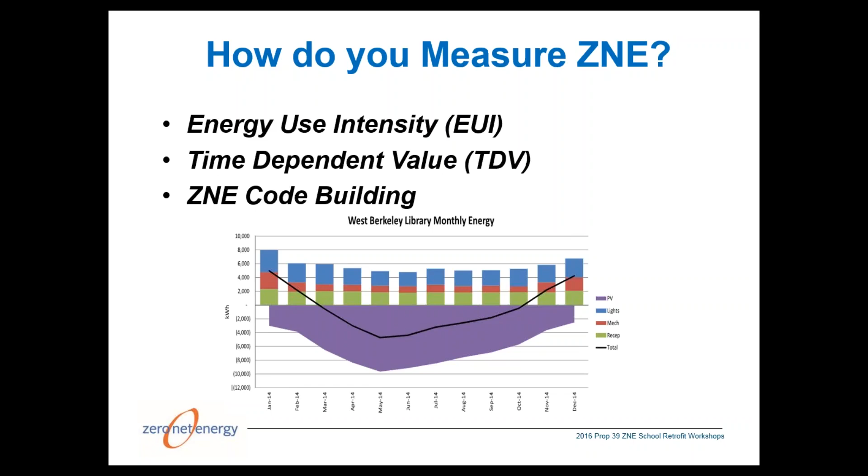And then there's a ZNE code building, right? So we're looking at getting the code to zero, and a ZNE code building would also be using TDV, and we're going to see this coming, and it's already happening in the use of reach codes and the code cycles that we have coming up.

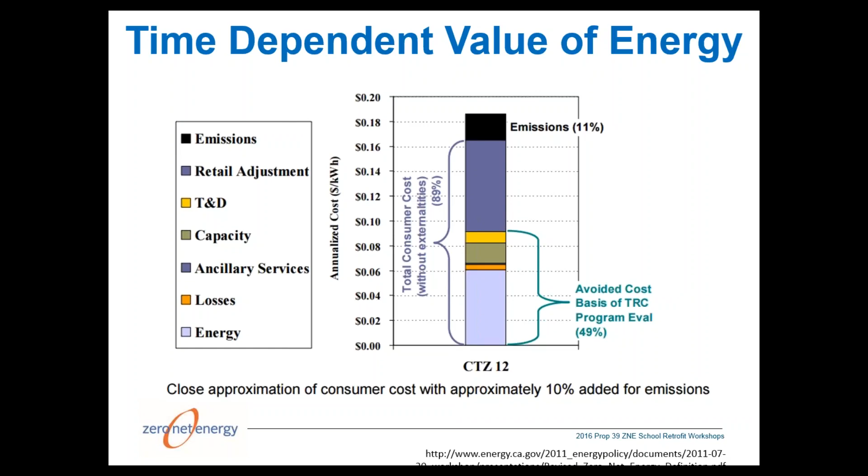So here's, I think, a fairly simple way to understand time-dependent value of energy, and again, that TDV metric, basically saying that we're not just thinking about energy, which is that light blue bar on the bottom, but we're also thinking about the cost or impacts of losses of energy, the ancillary services that utilities and energy provides, the capacity of the utility grid and the need for capacity when energy load comes on to the utility grid. There's transmission and distribution costs and the impacts associated with that. There's a retail rate adjustment that the utilities use to factor in the cost between the wholesale rate and the retail rate, and then basically the impacts of emissions from energy generation or electricity generation. So the price of electricity is really factoring in all of these things, and so this is why the California Energy Commission is using TDV instead of just electrons or electricity or kilowatt hours for buildings in California, and this is what's being used for the ZNE definition in California.

So I'm going to hand it over to Heather to give you a status update on ZNE, and really to set the context for these zero net energy retrofit pilots.

Thanks, Rob. NBI has been tracking zero net energy buildings for a good long time, and we probably have more information than any other organization out there. We're happy to share a lot of that with you as resources, and we'll cover that more at the end of the webinar. I hope you'll stay on. I know it's a bit of a longer webinar, but there's a lot of meat here that can help you in your process.

One of the great resources we have is our Getting to Zero Buildings database, the largest database on ZNE buildings in North America, and it's a portal into the Department of Energy's High Performance Buildings database. There's a lot of great detail — you can get summary information, but also in-depth information from case studies, including costs, finance, and design strategies. It's one of the only databases searchable by ZNE status and energy performance. When you have a chance, please check that out.

Much of our research has been based on our initial report that started in 2012, where we did a national scan and looked at all of the ZNE buildings we could find through case studies and design teams, trying to document all of the buildings across the country, both verified and emerging. Now we've documented 44 states and provinces with ZNE buildings.

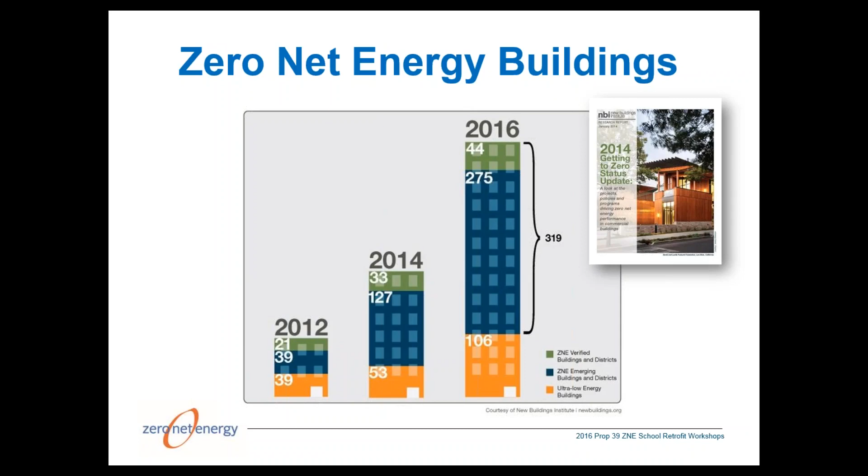We still have a small set of verified buildings, but that doesn't mean there aren't a good number out there — it's just that getting the data is a challenge, so we encourage you to continue sharing your data with us. These are the ones we're aware of. So please tell us more if you have a verified building, or think your building is performing at zero.

A good set of this started in the public sector but is consistently moving into the private sector, as well as nonprofits really walking the talk with their mission — buildings like the Packard Foundation, the Hilton Foundation, and other Bullitt Center-type buildings demonstrating leadership. We're also seeing this happen not only in new construction projects but very possible in renovation — a quarter of the market is in renovations.

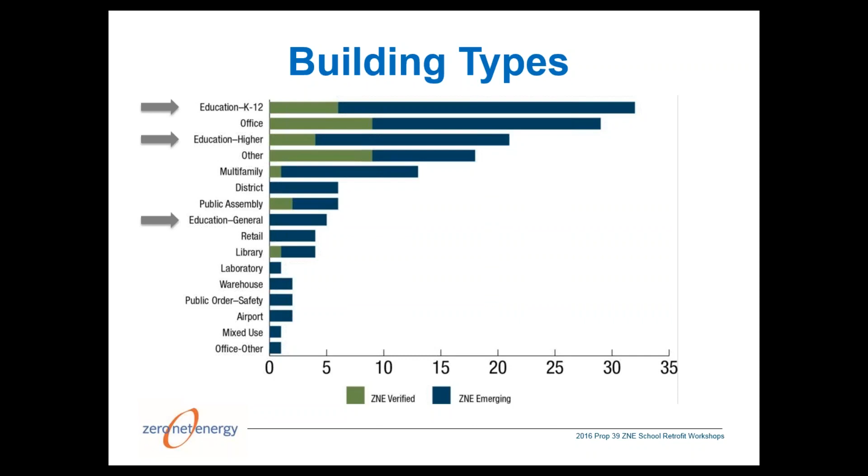A broad diversity of building types, as I mentioned, but also the education sector is really leading, both from K through 12, higher education, and general assembly, so like libraries, such as the California building, the Berkeley West Branch Library, which was also just, and it's actually a net positive building, just verified as LEED Platinum and certified by the International Living Future Institute. So we have a lot to learn from this education sector really moving into this market.

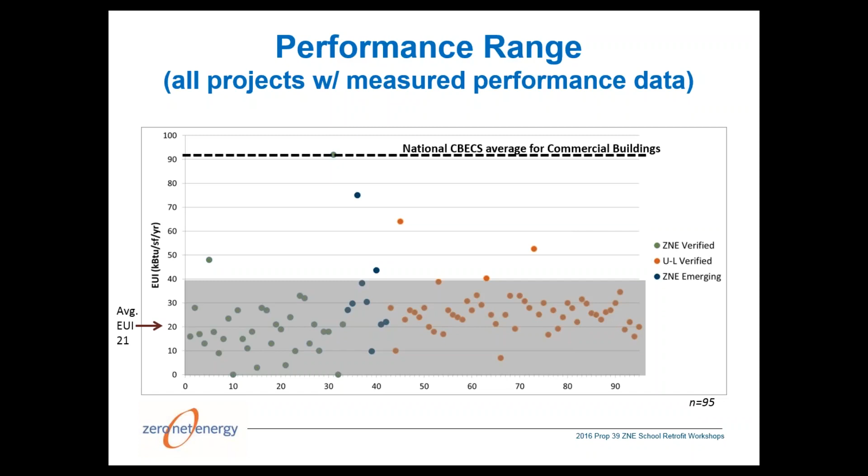When we looked at all of the buildings with measured performance data, we saw a consistent bar compared to what our national commercial building energy consumption survey average was for these buildings. We wanted to highlight that this was in a spectrum of 0 to 40 of energy use intensity, and the average was around 21. That's a good benchmark to know, because we've heard from other designers that if you aim for around 20 for an EUI, and your building is maybe 2 stories, you can probably get enough photovoltaics on there to get to zero. There's a similar range when we looked at all the education buildings that were verified, around 24.5 was the average. So we're seeing buildings getting even lower EUIs than that as we have more and more data.

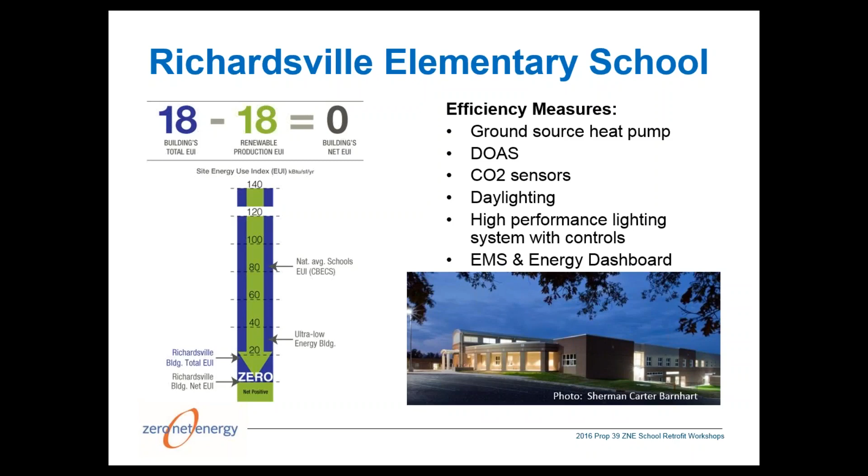A particularly great example of this is the Richardsville Elementary School in Kentucky, one of a set of 6 schools that CMTA design firm was hired to develop. As each school was designed and built, they learned from the last project and were able to incorporate more and more energy efficiency measures to get to zero.

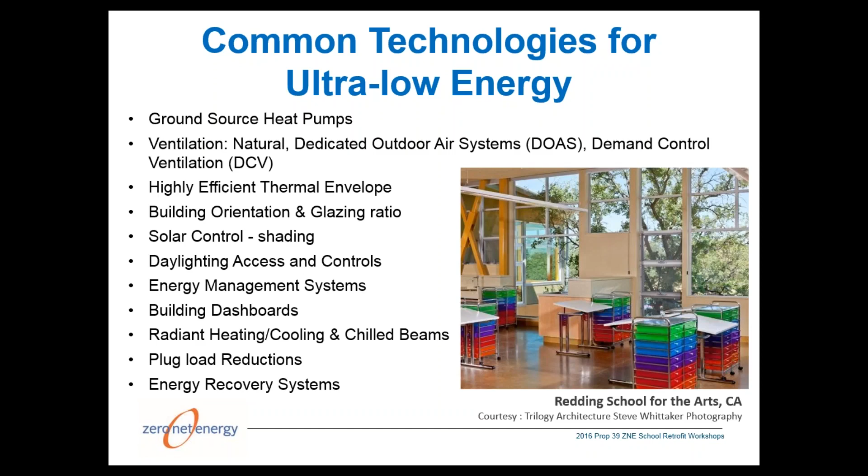So through these projects, we're seeing there are very common efficiency measures, similar to what we found across the board, common technologies getting to ultra-low energy: high efficient envelope, building orientation and glazing with a strong focus on daylighting and controls, using energy management systems and dashboards, and a focus on plug load reductions. That's particularly important to think about as we get our buildings much tighter in their envelopes and work with our lighting and HVAC systems, since plug loads become a much larger piece of the pie we have to address.

Some of the challenges when looking at where ZNE is moving and what the perception in the market is really center on the perception of cost, not necessarily cost itself, but perception of cost. We're finding we're able to get there within a reasonable range of construction costs, but helping overcome that perception is important. Often photovoltaics are delayed due to cost, and getting the metering and data right, and using the data correctly, is also sometimes a challenge, making sure people are trained appropriately to use that data effectively to adjust and course correct where needed.

Often the projects are not occupied or operated as modeled, so that's another thing to be attentive to. Are you having a higher number of students in a building, or maybe not operating on the schedule that was originally designed and worked out with the design team?

Commissioning is becoming an increasingly important part of the design process, making sure you have maybe a longer time frame in your contract, that it might take 2 years instead of 1 year to really tune up the building appropriately.

And then last but certainly not least is the fear of disclosure. We can tell you about the buildings we know about, but there are many more excellent examples out there, and I think there's a perception that if you're not at zero, there's something to be a little embarrassed about, like a failing grade. We really want to emphasize: don't be afraid to share. There's so much we can learn from each of these projects that can inform other new emerging projects. We want people to be able to share their data. Maybe you're not quite at zero, but it's still a really great building and something to be proud of. We really hope people will continue to share their data with us.

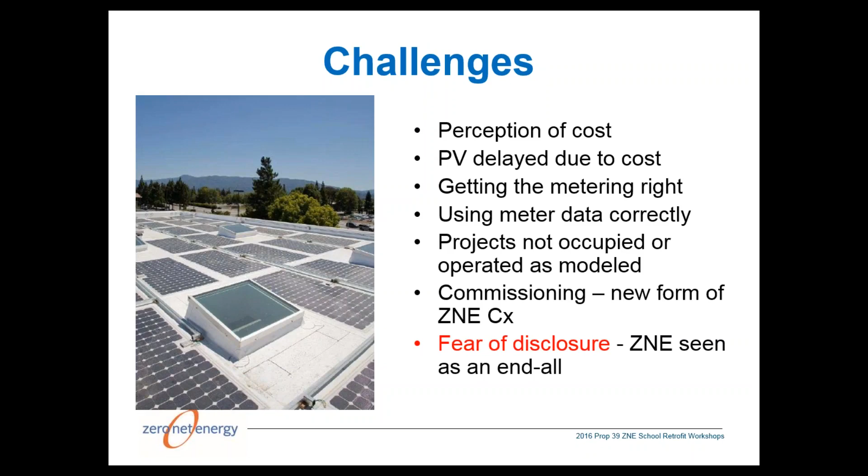One of the great resources that has emerged over the last year, in support of the California Public Utilities Commission, that NBI produces, is the California ZNE watch list. This is a great list of all the verified and emerging buildings in California. Last time we did the list it was around 70 projects, and we'll be putting out a new one in the next couple of weeks with even higher numbers.

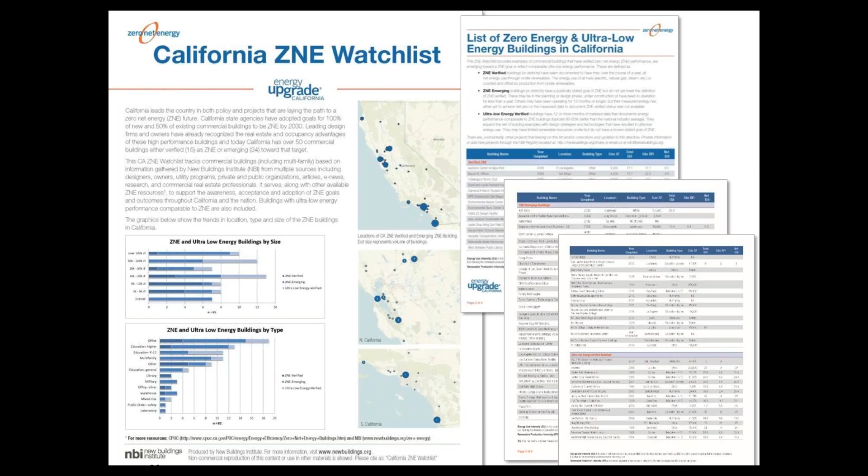So this is a nice way to look at other projects that are out there that might be similar to yours, learn about the design teams that maybe you might want to approach for a project you're doing, look at how these buildings have performed. This is a great resource for you to kind of track and get on our notice list when these come out.

Also wanted to mention where we are nationally on the school side. We're at a very early stage for schools, but California is continuing to lead much farther out in advance. There will be many more added to this set, particularly with the pilots coming forward and more schools that people keep telling us about. So we wanted to jump into talking about how you can learn from these projects using case studies as your guide.

We'll talk a little bit about some ZNE and ultra-low energy case studies, roughly and briefly, and then we'll have Pauline Souza from WRNS Studio join us to talk about one of the first verified ZNE school projects in California.

As part of the Prop 39 work, NBI is developing 5 new case studies. This documents some of the design strategies, but also some of the planning and lessons learned of these projects. This pilot is about zero net energy school retrofits, both K through 12 and community colleges. But there really aren't any ZNE school retrofit examples yet, so we scanned the market for projects, both big and small, that we could learn from that had different strategies we thought were most valuable.

These are the set that we have developed some draft case studies for, and we'll be coming forward with those in the next few months to share with you. For the Berkeley West Branch Library, even though that is not a school building, it is a very typical building type for schools. Pauline will talk about the Stevens Library at Sacred Heart Elementary School, which is a good example many schools can think about for their libraries.

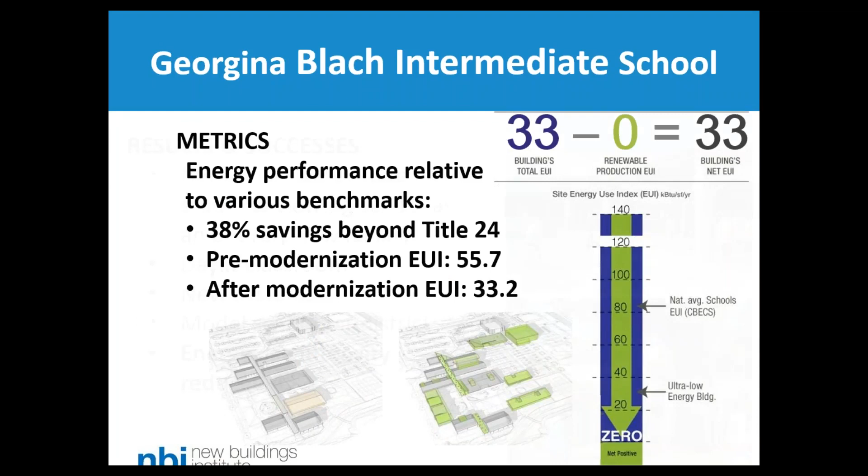There's a lot to learn from this particular project too. Very high energy savings beyond Title 24, lots of daylighting, and it became a model school for the district, which then inspired the district to look across their portfolio of buildings and do special studies.

To find out how much further they would need to go if they wanted to achieve net zero energy or net zero water too. So there are some more California examples I wanted to mention. We'll hear about the Stevens Library as well in a moment, but also the Redding School of the Arts is an emerging ZNE project. We have a case study, an NBI, on our website that was one of 8 we've done for the California Public Utilities Commission - these are nice short case study briefs, 2 pages, that make a good example if you want to bring this to your superintendent or school board.

If you want to be educating and advocating for this - this is an emerging ZNE building. I think it has an EUI of 8. What they've done as an interesting strategy is continually add photovoltaics to get to that low level. So even if you can't put it on all at one time, you can continue to add it.

We're going to be doing a tour on May 9th of the Solano School, which is an emerging ZNE project in Southern California. That was designed for ZNE, and they'll be adding their photovoltaics over time. The Blackford School is one of 8 ZNE projects that the Campbell School District has decided to pursue, and I think 2 of those 8 have been built - they're using kind of a prototype approach, so there are some interesting lessons to learn there, and La Escuelita in Oakland is another good example.

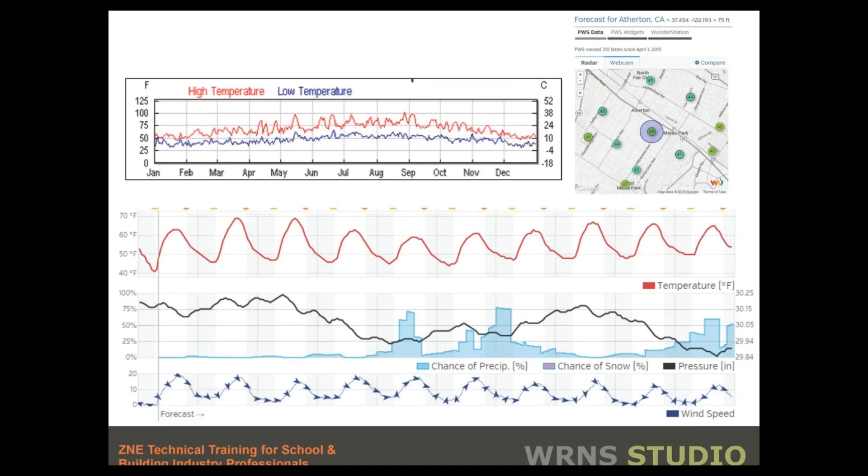A view of the trees we worked around. What a lot of you know is that before you start, you gather what you have - the forecast, the temperatures, the wind, where it's all coming from - and then you start to make sure you're designing with all those considerations.

We often use not just benchmark systems like LEED or Living Building, but also the ideas brought to us through the AIA COTE measures, really about flexibility, long life, and feedback loops.

The key again is that this project, although in an affluent area, did not have that affluence trickle down to this particular project. It was about $250 to $300 a square foot - that's what we were asked to design to. In that area at that time, that was 20% less, normalized across the project for this building we're going to talk about next, and then again the campus.

The next slide shows the 4 buildings, and our targets - what we understood at the time that CBECS provided us - and then this evolved approach where we were looking at various benchmark systems.

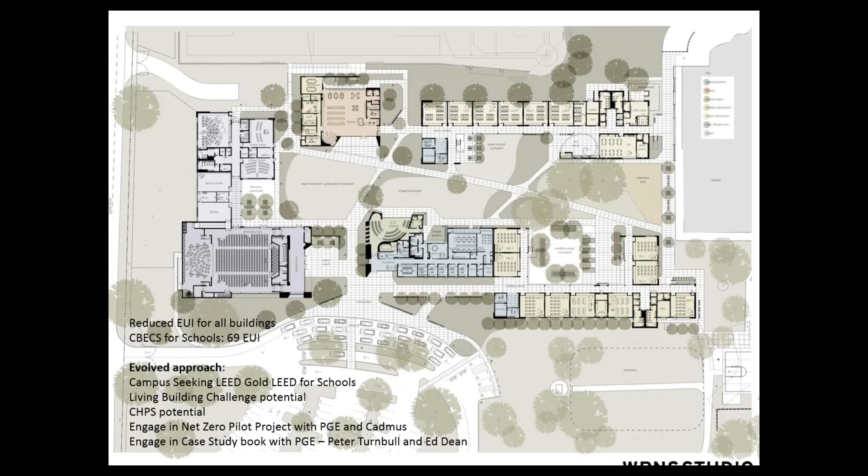We engaged in a net zero pilot project with PG&E and their consultant Cadmus, and then with others - Peter Turnbull and Ed Dean - in trying to tell this story. Our project was also, because it was a campus...

we looked at what we could do to make efficient buildings, and how those flat roofs could not only be used to collect water for reuse, but those roofs are all designed for and are PV-ready. There's space allocated and noted in the construction documents for future inverters, there are pathways up to the roof, and the structure was designed to make sure that could be done later.

So this is about future-proofing, or making it future-ready for net zero if it couldn't be done right away. As this evolved through DD, we talked about that as a strategy, even though it wasn't clear that the money could be there for PVs.

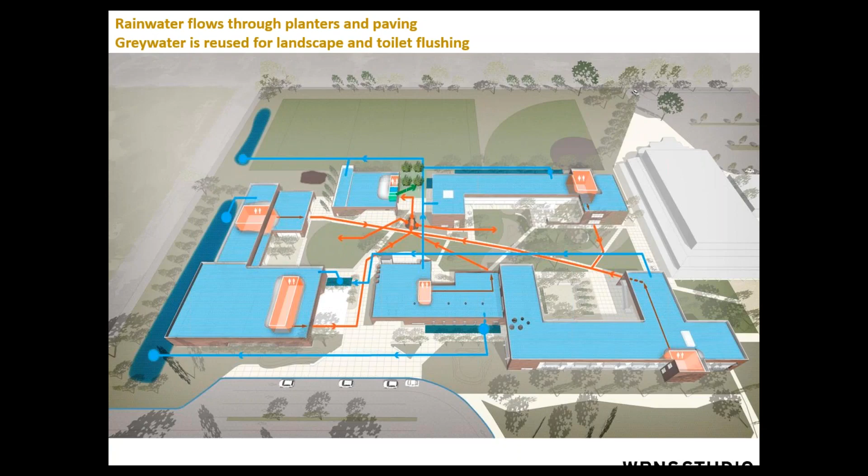So that's the building at the top that I'm going to talk about. Against the CBECS standard, we thought we could get to a 27 EUI. That's the south elevation over there in the back.

And that inspired them to find the money somewhere within the buildings. We had to work with our estimator and really with the builder. But the fact that the story evolved with the design, and we were able to show it was possible, got them so excited that they started to move towards approving for the LEED final submission to look at the Living Building Challenge net zero participation, and then we're continuing to look at it from a petal recognition.

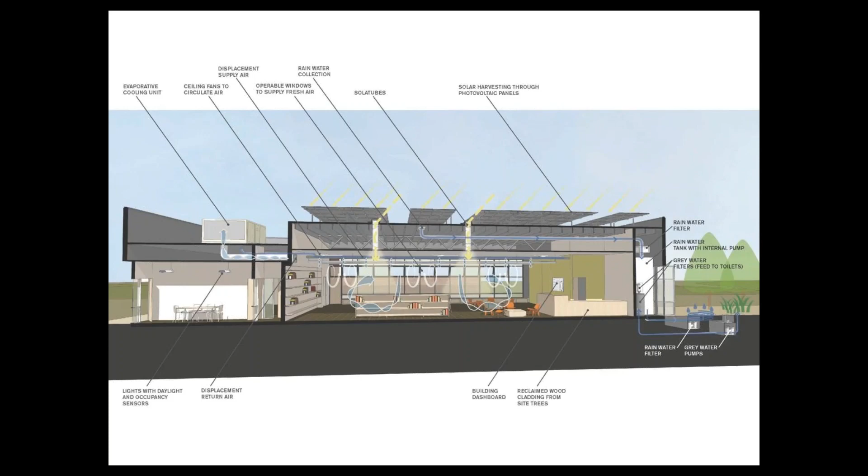So the next slide, just a little bit on the stats. The system is mixed mode, using the concepts of displacement ventilation. We have air that comes over the top of the main book space, flows down, and then sort of puddles, as many of you know, and then is exhausted through another point, which I'll show you. That strategy was very efficient, so we used larger ducts, having windows at two ends to allow for fresh air, so it could help augment that main space.

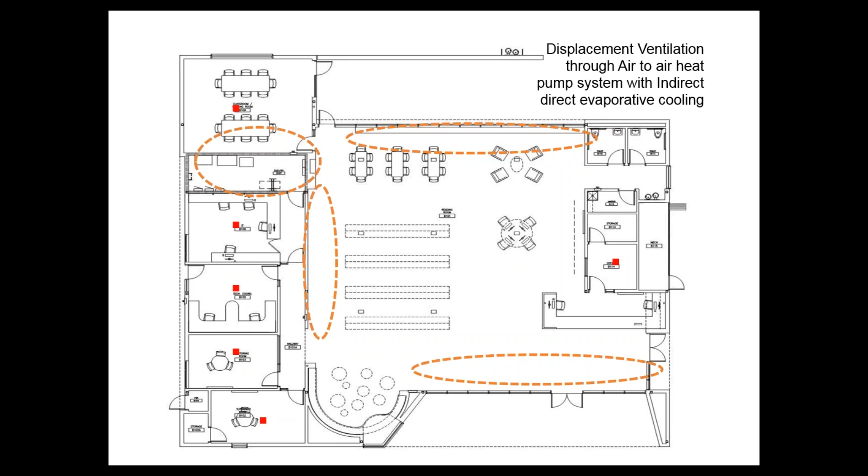Next slide. And then solar tubes - so the dashed lines show where the displacement was coming through, both in the top and bottom orange dashed lines, and then to the left, that's where the exhaust would be.

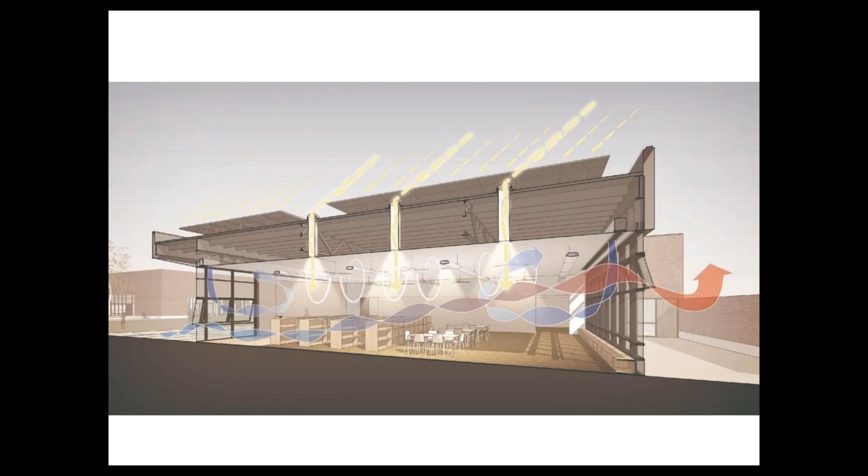Showing how simple daylighting strategies at the top for solar tubes could be manipulated and tuned down. Good light from the north and south. We really tried to tune that exterior as we were doing some work to see how light would penetrate. We've learned a little bit of a lesson in terms of daylighting, that you need to use a few better tools, because we thought we cut out a lot of glare, but there's still a little that trickles in between 11 and 12. But just the idea to tune it to daylighting.

And then the roof is shown that we were able to fit 170 panels, at that time 250 watts per panel, sized to be 40 kW over the target, which at that time 15% seemed to be the right strategy. We had to change from tilted to flat panels, which is a little less efficient, about 13%, because the city didn't want to see anything over a certain height limitation. So there was that that we had to work through.

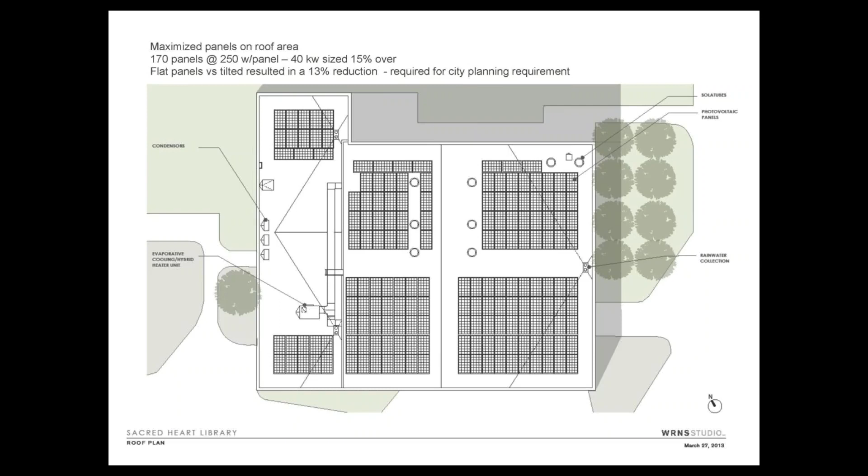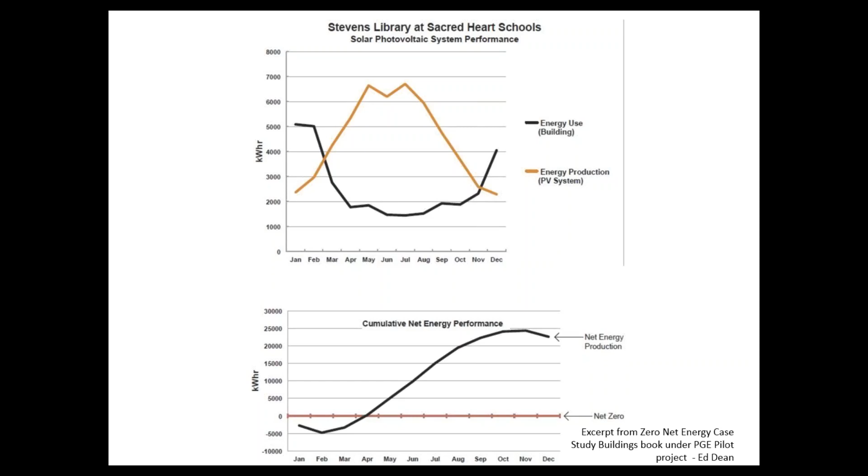And then the next slide, just showing performance, which we were able to track. Again, like I said, we had PG&E that was our partner through the end of the phases. They came in with their own metering, and we were able to compare what we were seeing and what they were seeing to show that we were overall producing more than we were using.

Next. And then to show that in the graphs that we would collect through its use, the prediction was 50,000 kWh, and then as we were measuring, we were really seeing that it produced more, approximately 56,000 kWh. So that was a good sign.

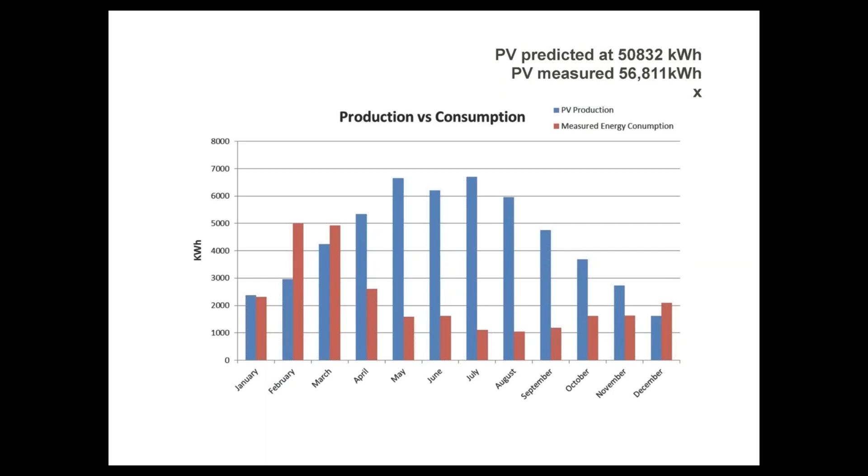And then we started to understand what some of the challenges were in comparing our modeling data, or at least what we predicted, to how it was being used. And I think this is our big next step.

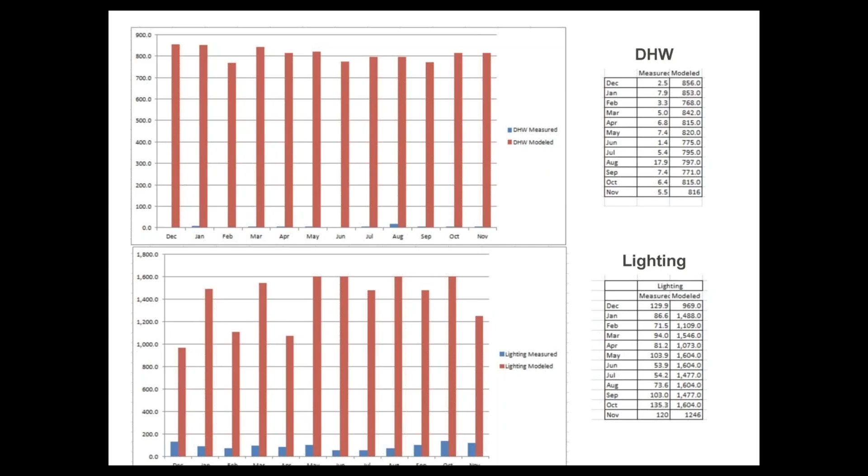The hot water heater was not being used as it was modeled - you can see quite a big difference. And then the lighting too, as was modeled, is not how it was being tracked. I think we attribute that to the modeling software not being able to be tuned to the contribution of natural daylight, and probably because as people are more tuned into this building being an example of sustainable strategies, they know that they don't want the lights on. So there's a little people side of it that we were hoping to track more of.

Mechanical seems really pretty close to what was predicted. January and February were days where the systems weren't working well, and so that's aligned with what we were finding out, and the miscellaneous, as we talked about, sort of all the other plug load and how we had modeled it - but really, again, maybe the people side brings the measured part down.

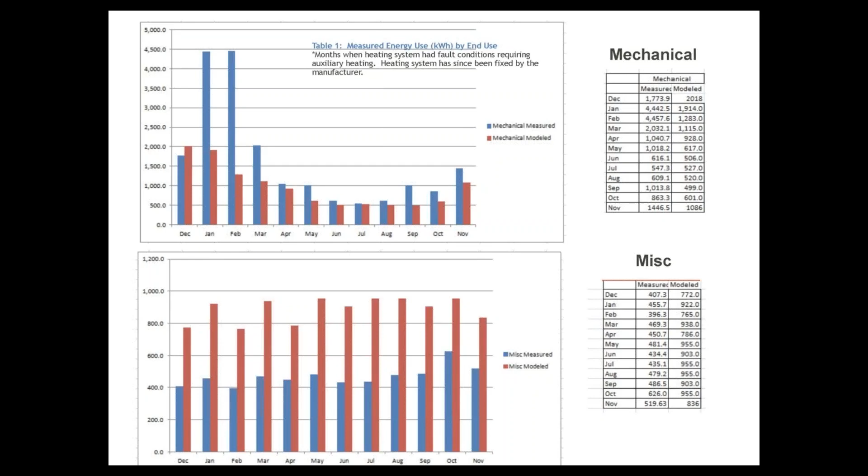So the highs and the lows, which really can be attributed to better tracking and constant communication.

And the envelope - so in the envelope, we really were of the mind that we had to reduce where we could. So you reduce before you produce, right? So the envelope was really studied. We thought we were getting to pretty good R values.

As we were going through construction documents, the owners found out from their insurance company that if they had a metal stud building, they could reduce their insurance burden enough that it made sense to change it out. But it changed our energy model data, and if we had stuck with wood, we could have made a real difference in that envelope. I think we would have been at R20 versus R12. So that's a lesson we learned.

It speaks to looking at your envelope more as you design. What we also didn't do was put insulation below the slab, which I think we missed, and we're trying to be more careful of that now.

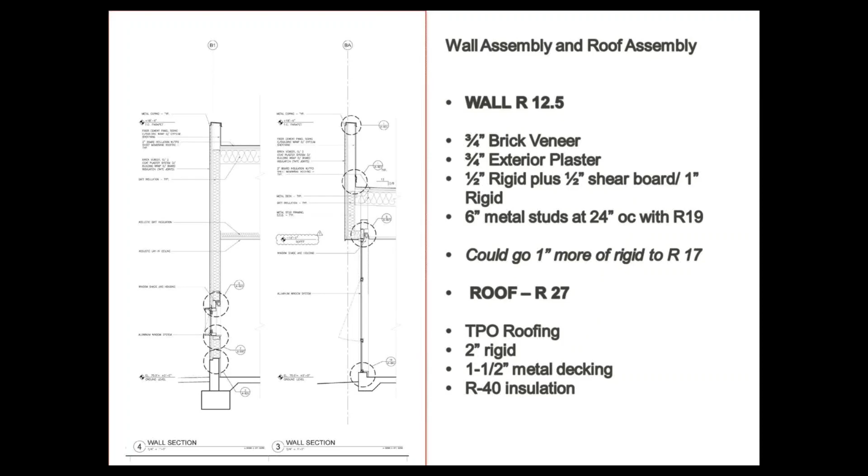Next slide. A picture again showing how that change in assembly from wood to metal had to be tracked. You could easily, in the throes of CDs, forget that you need to track that and how it needs to be accommodated in your energy budget.

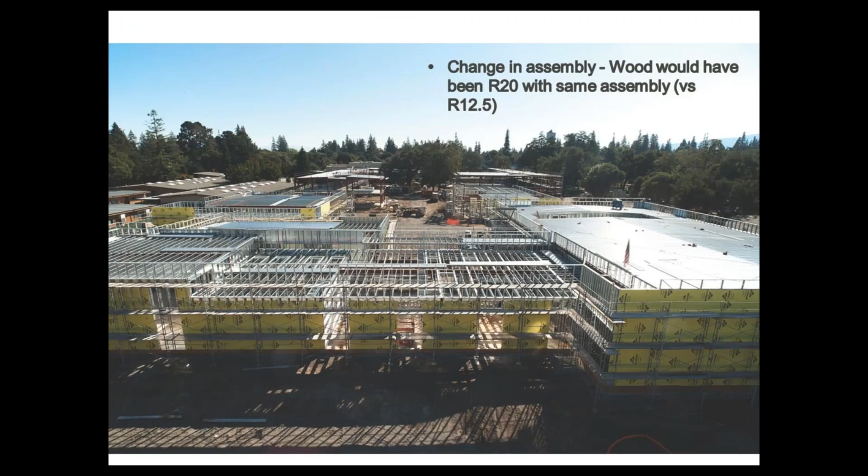So for lighting, we talked about the daylighting model and how that would have improved the comfort of the space, but also how artificial lighting needs to be tracked. The next slide shows in pie charts quite a change: the top chart shows 37% predicted, but as we tracked through it, it came to 4%. That's a huge difference in kWh, about 8,000 kWh, which is a big difference in terms of what we would have put in for PVs.

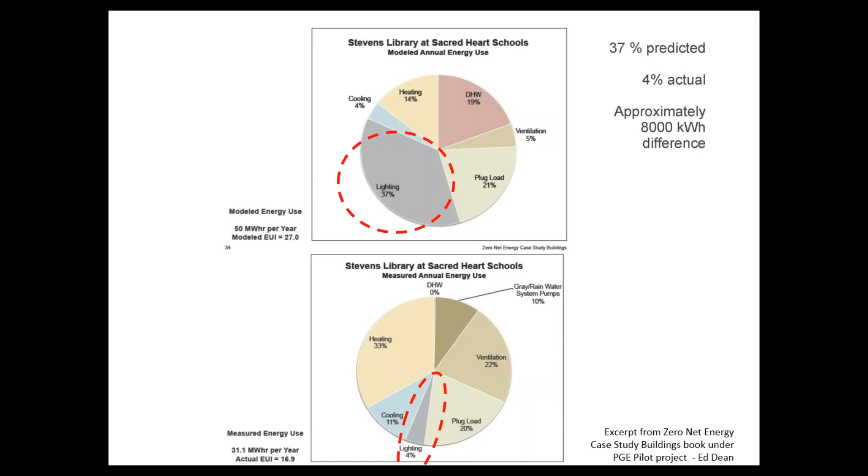That says a lot about how we looked at lighting and controls, and how we explained the building in ways that changed behavior. It really comes down to the people side of it that we have to be more aware of, and what their understanding is of comfort.

If we know the contribution of daylight is critical not just to the quality of the space but also to the predicted energy model, what programs are out there? What can we do to drive that into some sort of exceptional calculation, or to right-size the model?

So it goes a bit more into modeling the site and the plug loads. What we learned on a campus project is that everything is a little bigger than your footprint. The gray water system and all the pumps that make that work, through filtration and then irrigation, was burdened to the library. All of that you see on screen to make it work was tied to the electrical panel in the library just because it was closest, and we didn't account for that in the model.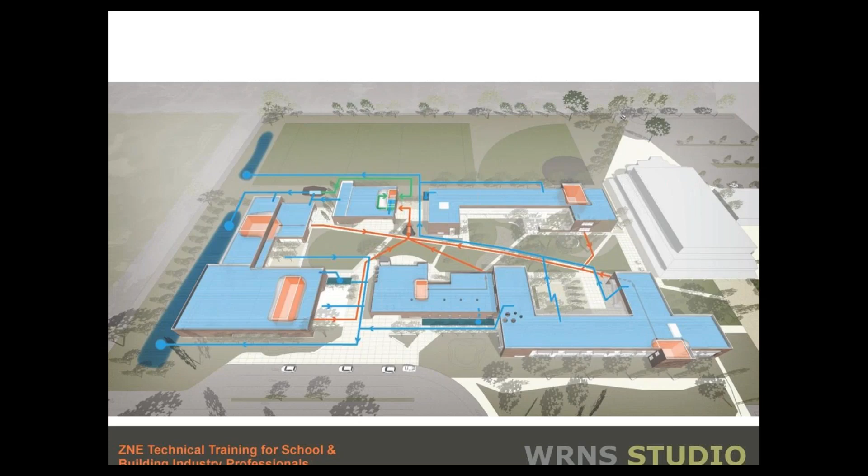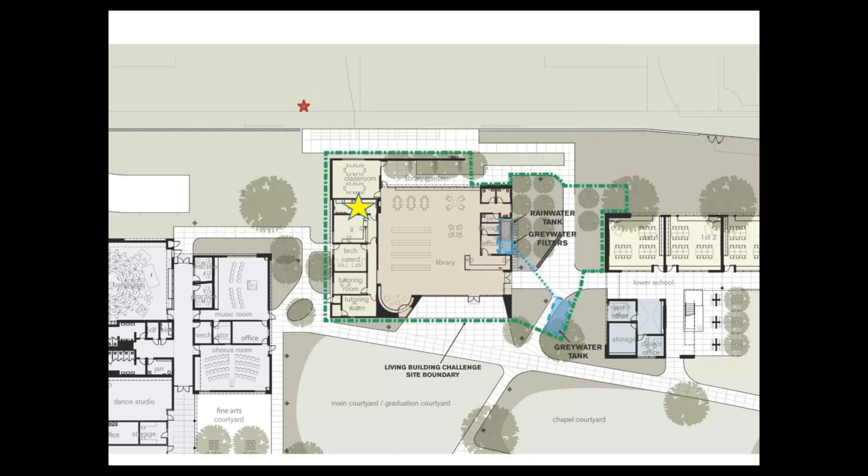Just again a diagram to show that. So if you're working on a project with a bigger footprint, watch out and really have your model be part of your conversation, not just a deliverable that gets filed away—use it as a communication tool as you go through. These are some images showing how close those components were and how they were tied to the building.

The next slide shows, hopefully, how the PG&E folks were tracking that the gray water system really accounted for 3,000 kWh. That was not predicted originally in the model, but as we were metering, we had to include that into our actual calculations.

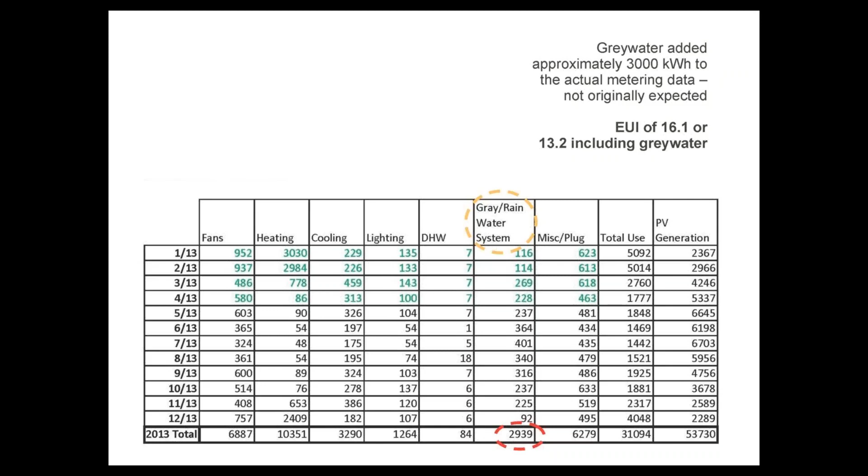So this building, with that included, has an EUI of 16.1. If we excluded it, since that system serves the whole campus, the building itself would be at 13.2. But to be fair to what it's actually seeing, that campus gray water system is burdened to the building. So again, watch your model and continue the conversation, because things like this happen—while you're in design you think you've already noted all your data and targets, but things change.

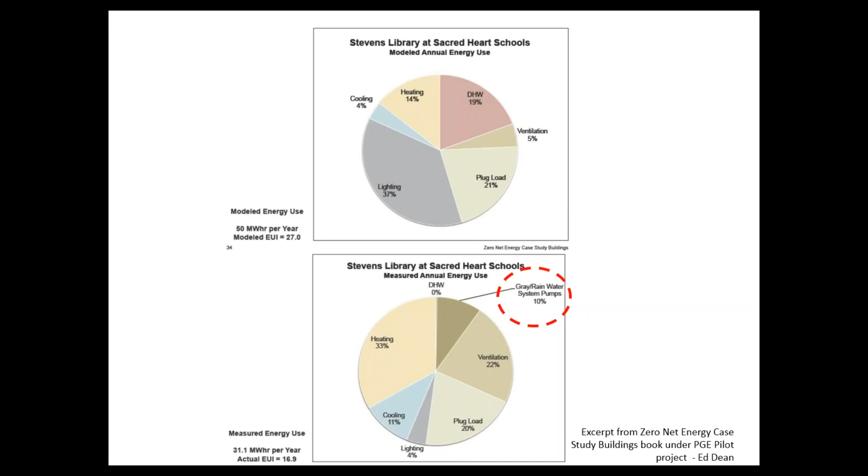So the next slide should show a little bit more about this point about how much PV you need for your building. And as we know, the prediction was 50,000 kWh approximately, and the measured was a good 56,000, so it was producing more than we thought. But the demand, based on all the things that were shown, is really much less than what we thought. And so that's great news, but also...

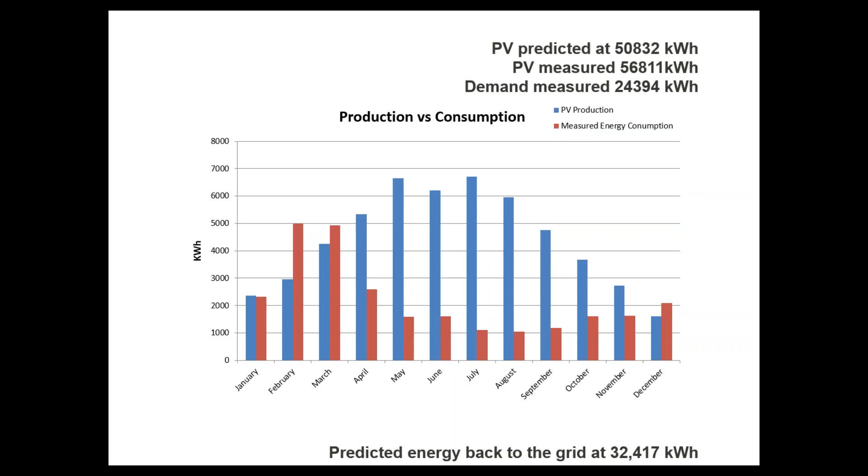It tells us in the next slide, did we put in too much PV? Even though we accommodated that 15%, which everyone knew would give us a little bit of cushion, you should see in the next slide that if we take all of those things into account, the lighting and the gray water, with that 8,000 kW difference, did we put too much PV on the project? And that's always an issue of budget, especially when budget is such a big part of the conversation, which I can't imagine there's a project where it isn't.

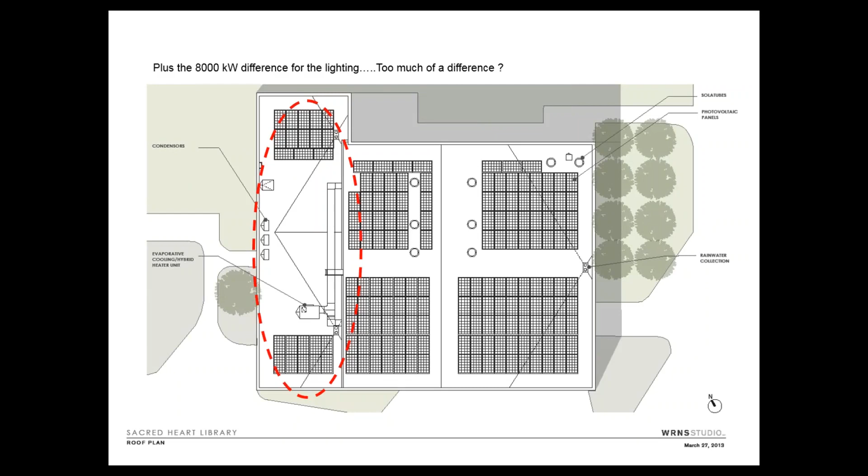Is it too much? Now on this campus, as mentioned, the idea is for all those rooftops to have PVs, and so it can be attributed to the overall campus goal. But when you're in a more urban setting, is it too much and is it too good? So what's that sweet spot, and how do we plan or talk to our clients about planning for PVs so that maybe the end goal is an evolution of getting to net zero, and how do we do that after we can actually measure how people use a building?

Next slide. So again, just a few more slides to show how we were tracking the different uses through the year. And how that information told us too that BMS controls is another thing that we need to look at.

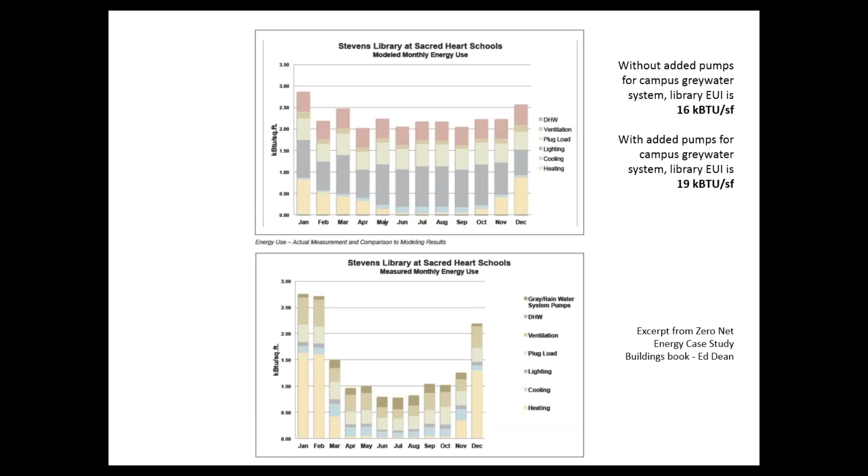And that language, if you see in the next slide, is something that we all as designers and engineers need to know and understand a bit more about, because we were finding out that the inverters and the controls were not talking to each other. We couldn't track what was going on.

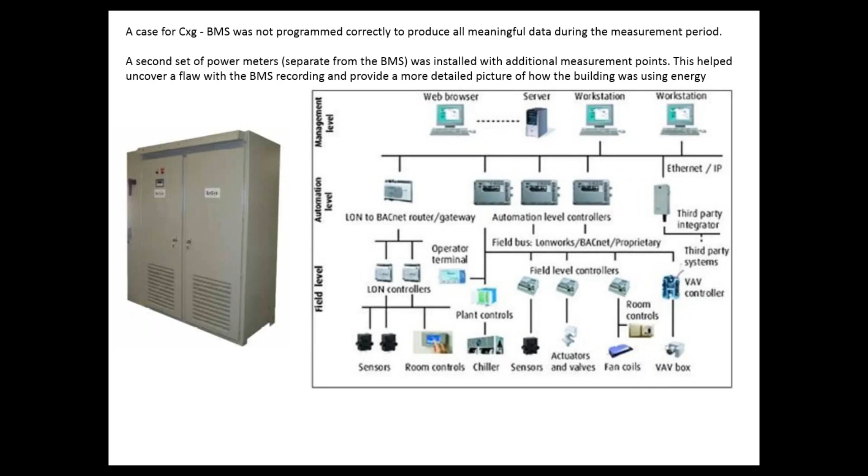In fact, there was some failure that if we hadn't been trying to find that information towards a net zero certification, or just to see how well we were doing, we wouldn't have known that there were problems. And at that time too, the inverter company, Satcon, was going out of business, and so we were having a hard time.

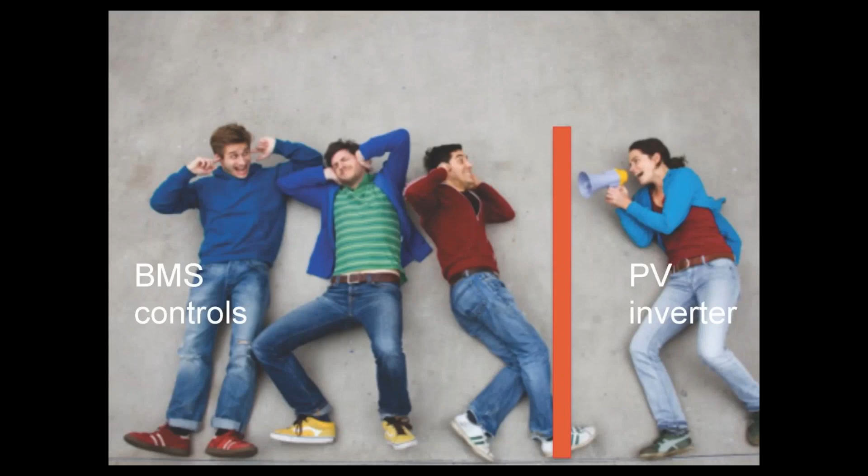But again, it says there's more for us to do to understand how these things are linked together. And then, to be able to track in other ways, this is a snapshot of the inverter, to make sure we know that everything is talking to each other and working together for the actual tracking. And we did this as part of our submission to ILFI for net zero certification.

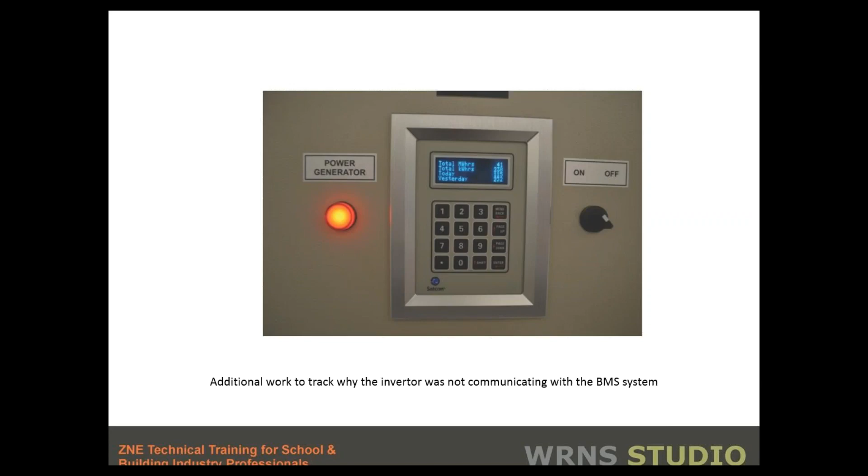Next slide. So as I think was said by the NBI team, use your basis of design as your roadmap, and use that as a part of the communication tool, not just with the owner, but with each other. And then maybe to remember that some of the good things that come out of this, the highs, if you will...

Result in showing to the wider community that getting to net zero is something that can happen, even if it's not a part of your very first target, that it can evolve to that if you work together. And then the next slide shows that there's some good things that happen with it.

This is just the presentation of the net zero plaque from ILFI and our client there in the purple sweater. And our toughest audience is the students of that school, because they asked a lot of questions that our engineers had to think about how to answer.

And then the next slides, really having them participate in understanding how things work, and how it ties together with their campus, is a part of bringing that, we hope, to more projects. And the next slide showed just that it's not just about dollars saved, but it's about environmental stewardship.

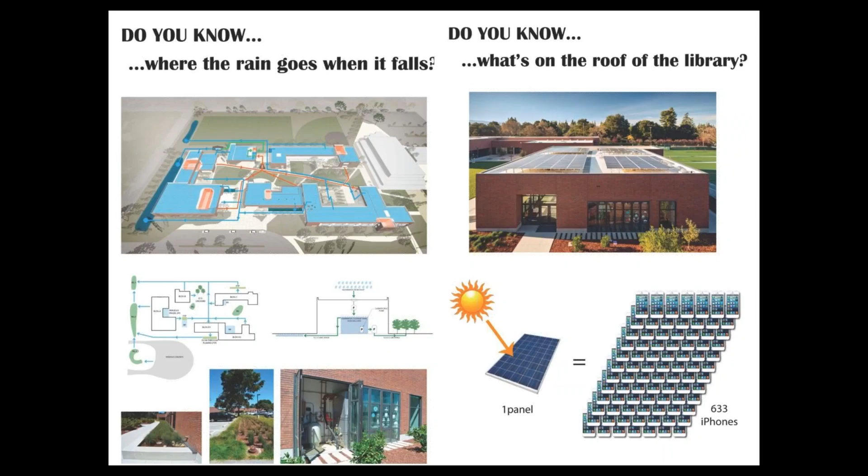And if you continue through a couple of the next slides, we just thought we'd build some graphics into the building itself and into boards, which then we've used to show them at some events. It's kind of tying how many PV panels you need to power an iPhone, making it relevant, and then the educators have used that to continue bringing that forward in their curriculum.

That dashed area is where there's a dynamic monitor tied to a Lucid system that's tied to the BMS, which they use to see what's happening. We've actually used it — I've gone there a couple times and pressed the button. You can see in the next slide it tracks how much is being produced. A couple times it hasn't shown anything and we'll go, oh my gosh, what's going on there? So I think it's a really quick way for anybody to understand how things are working and what's being produced, but also how well the systems are working and communicating with each other.

The next slide shows a couple more comparisons of what's happening — they compare each building. I'll end with this.

Two little boys were coming to the school to go over some new things, and they were really excited about playing with the screen. Then they ran around the corner, and then ran back — I realized what was happening was that they were flushing the toilets and then going back to the screen to see how the graph was moving. They did that a couple times. I'm sure that wasn't the first time. It wasn't the intent of that system, but it meant they were actually using it — they were making a connection.

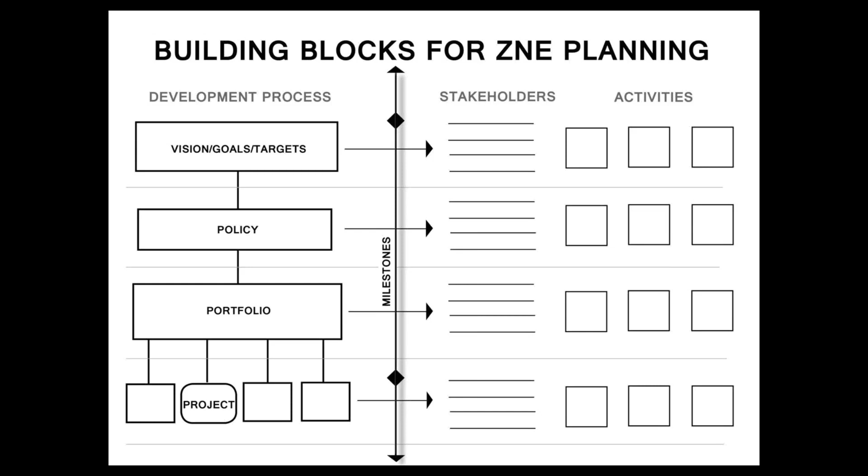As you go through this process, you say, well, maybe we need to set some policies that we need the school board to adopt, and who are the relevant stakeholders for the policy making, and what are those activities. Then looking at the district or the portfolio of buildings, either on a campus or throughout the district, and then getting down to individual projects. So the idea of this template is just to give you a framework through which you can work on developing your ZNE plan. And then there are other worksheets that help you.

Basically, these are exercises in the workshop. We often use these to have people take a chance to think about articulating a vision and really defining success, and then identifying targets and milestones. So again, supportive tools that you can use to start your ZNE plan process.

We also are very supportive of this concept of backcasting. Rather than trying to forecast your way to zero, you set that target for achieving zero net energy on a building, a campus, or throughout a district. Perhaps you have the same goal as the state of California, getting there by 2030. So we've got this template as a backcasting tool for the building scale and for portfolio scale, and it gives you the opportunity to think about a building in a much more

planful way, I think. So let's just talk about some fundamentals we've learned through this process—assembling your building blocks of your ZNE plan. One, you want to set your goals and milestones, and we have a worksheet for that. You do the backcasting exercise to say, if that's our end goal, what are the steps along the way that we need to take to achieve that success?

Identifying those key stakeholders and the communications goals. We actually have worksheets for stakeholder mapping. Who are your relevant stakeholders? And for all those key elements of developing the plan and the policies and communicating.

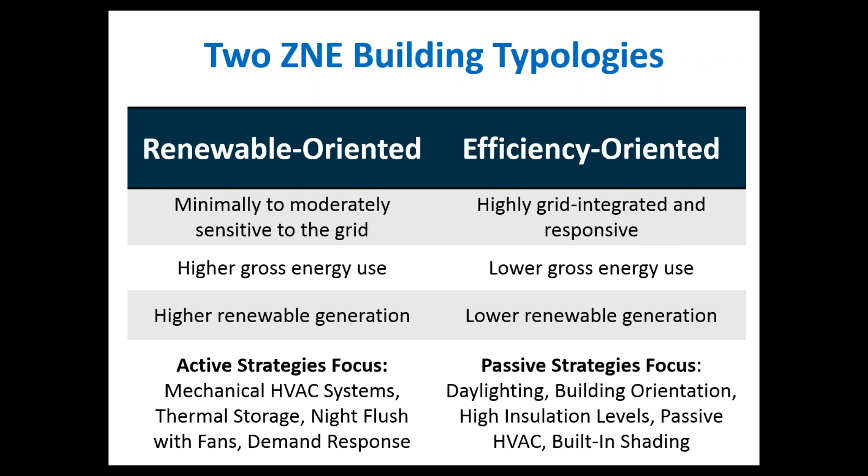We favor efficiency-oriented buildings - they're much more grid integrated and responsive, which actually has financial benefits if you're not using energy during peak demand times. Lower gross energy use, again lowering your total use of energy from the grid. Lower renewable generation, so that's a lower capital cost. And then really implementing as many passive strategies as you can, which are low cost and often have little or no moving parts, so lower maintenance.

So we really like this way of thinking about it. This is a diagram from Miller-Hull Partnership for the Bullitt Center in Seattle, a 6-story commercial office building on a zero lot line that has achieved zero net energy. Thinking about the starting point on the left, a typical office building in Seattle uses 72,000 BTUs per square foot per year. So the design team asked, how are we going to go about reducing total energy use in this building?

They started with heating and cooling and saw they could reduce pretty significantly the energy use in the building - a high performance envelope, heat recovery, ground source heat pump, demand controlled ventilation, and radiant heating and cooling. Then moving into lighting - maximizing daylighting, reducing lighting power density, and ultimately trying to control plug loads, tenant loads, and those unregulated loads.

They got the energy use intensity down to 16. So you see that the total renewable energy system could be much smaller, which also means a lower cost for that system. And I would add that the other key consideration, if you're considering power purchase agreements, is that you're still going to be purchasing energy from those renewables from that third party.

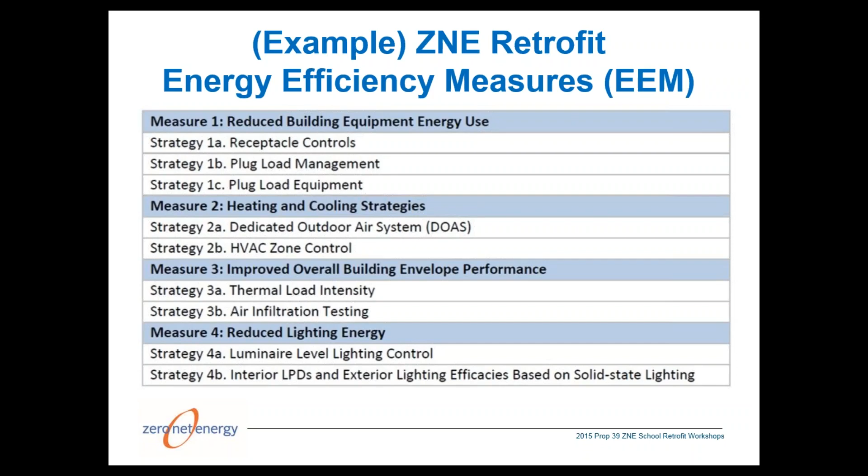It's also important not just to focus on energy, but think about how this fits in with other green building standards, for instance the Collaborative for High Performance Schools criteria, or LEED for schools, and think about energy as one factor of many that you can do to make a high quality learning and working environment in your school. Actually CHPS has a design toward zero net energy set of criteria, with criteria related to being ZNE ready or solar ready, ZNE capable. I think when you're going through this process, using the CHPS criteria can be a really beneficial strategy as well.

Referenced in CHPS is the Zero Energy Performance Index, or the ZEPI scale, and this is actually a great tool to be thinking about not just one building but maybe your whole district, and ranking your school's performance. This scale is basically built upon the CBECS. The 100 is set at the CBECS 2003 data point, and you can chart your course to getting to zero with the ZEPI scale. This is, again, referenced in CHPS, and it's something you can use as a common metric as well.

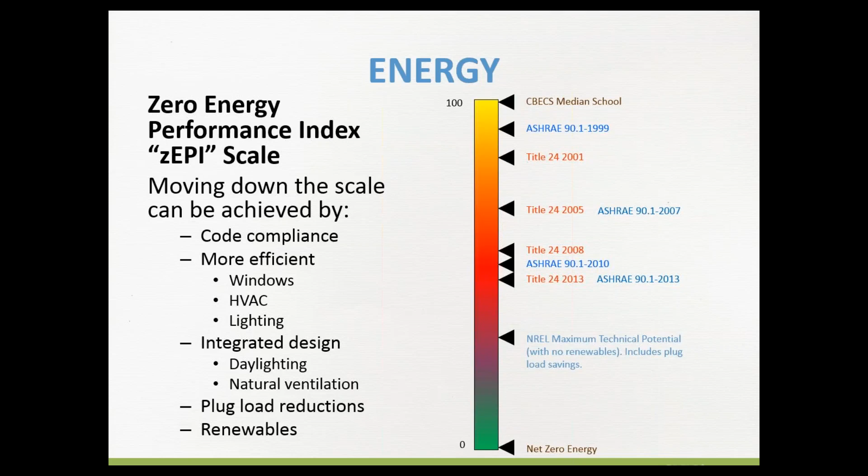Let's keep moving. Now that you've put in place your plan for getting to zero, you can be thinking about integrating it into your policies and delivery process. We're just going to quickly go through some of the things to consider when you're thinking about how to actually contract to get a ZNE building, and then moving into funding and financing and training and operations.

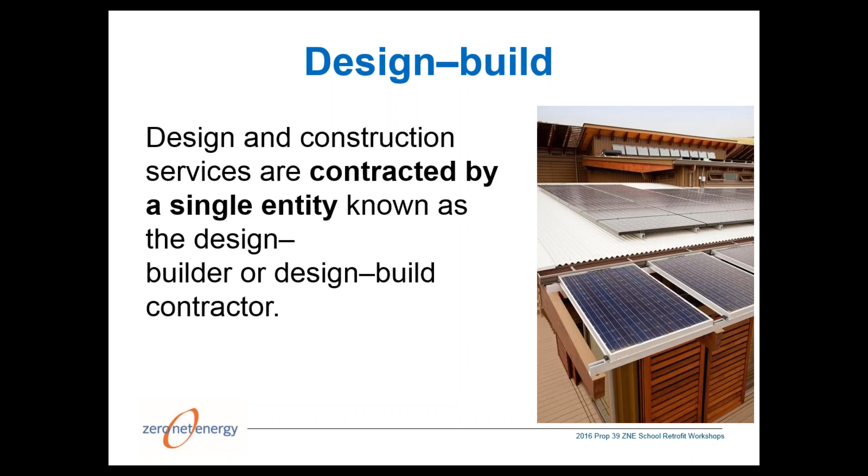I'll go back for a second, because in design bid build, even though you don't have the contractor on board, you can hire a contractor to do pre-construction services, and that could be very useful in terms of doing cost estimating and constructability evaluations.

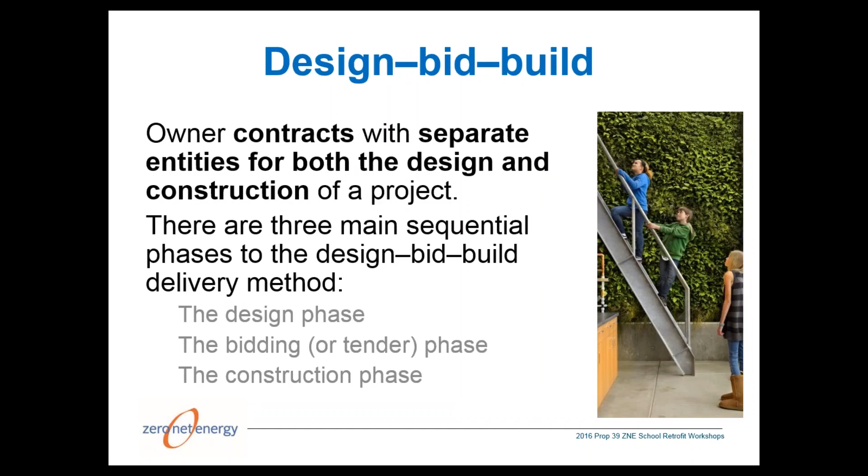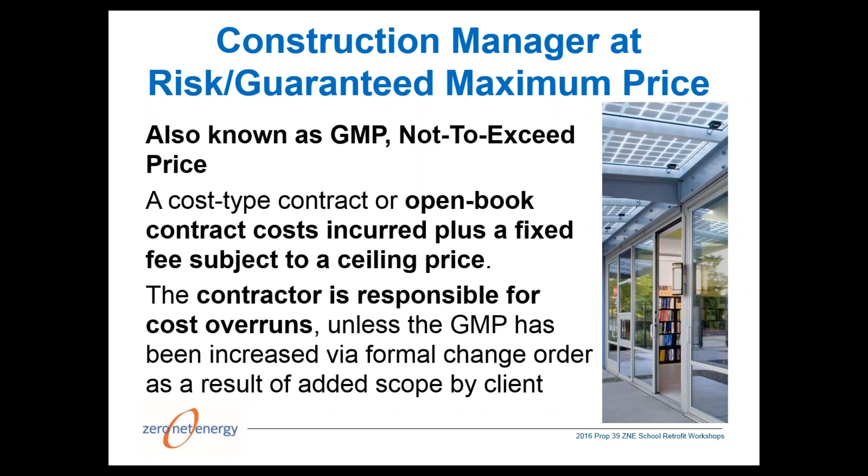Then there's CMGC, or guaranteed maximum price - another option where you could do this cost type contract, open book, where it's a fixed fee for the contract and the contractor's responsible for cost overruns. The key thing is that the contract documents have to be very solid, otherwise you'll have real challenges with change orders, which could be problematic. But having a guaranteed maximum price contract might be desirable.

Another option is a leaseback, basically working with a developer or contractor that will build a building and then lease it - that kind of lease-to-own scenario could be good. It's one way to get a building with a much lower first cost.

Another method is integrated project delivery. We're beginning to see this with high-performance buildings and ZNE buildings. This is really a three-party contract where the owner, the design team, and the contractor are in a three-party agreement, and it's more of a shared risk model. Something to think about if it's something you can do through your contracting process. But again, this is fairly new and not as common, so it may be challenging to do within your approved contracting methods.

Another one I think is really interesting, and we've recently learned of some examples of this in California, is working with an ESCO - a company that will partner with you to do an energy savings performance contract, or ESPC. That company comes in and partners with you, brings the capital, makes the energy efficiency improvements, and then shares in the savings. We're beginning to see this model emerge.

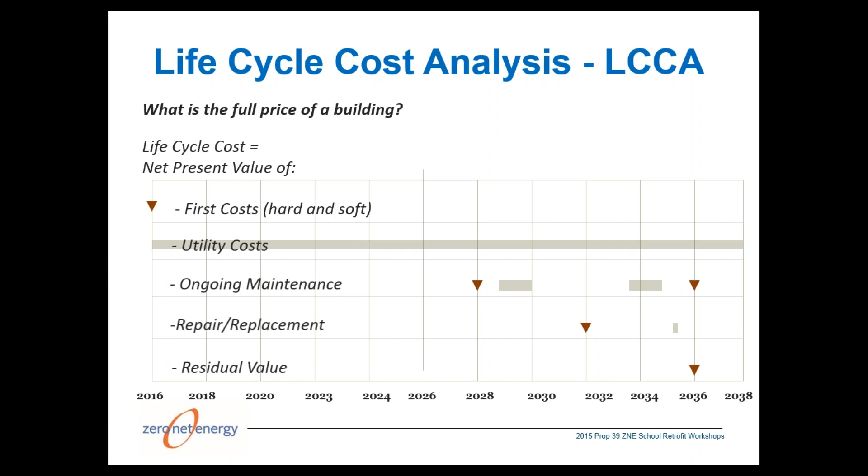This is a key method we recommend you integrate into your development process. There are many tools you can use - we've shown one example here. The state of Washington has one they've developed, an Excel spreadsheet called ELCCA, the Energy Lifecycle Cost Spreadsheet. It's a tool you can use to do lifecycle costing for your project and demonstrate that value. All state projects in Washington are required to do this, so this could be a good method for you as well. There are other tools out there you can consider using.

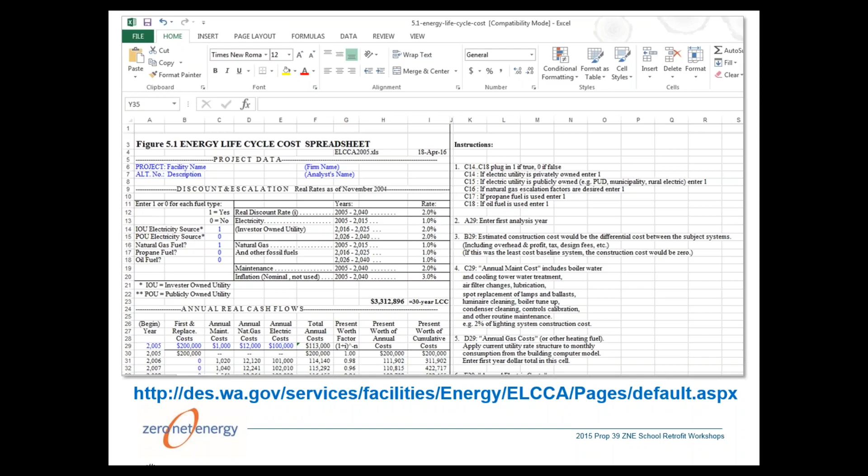Earlier, Heather and I were talking about fundraising and financing strategies, and there's a long list of them. Prop 39 is just one on the list, but there's still the Savings by Design program you can leverage. You could get funding for piloting and research, technology demonstrations through external grant funding, or this idea of ZNE ready - can we design for the future achievement of ZNE even if we can't do it right now, that upgradable design strategy.

The solar financing district, using PACE funding, coming up with prototypes like Campbell School District, where they knew they were going to build 8 schools. They developed a prototype, which can save a lot on design cost. They'll modify that over time as they develop and learn from building those prototypes.

I would suggest not just prototyping a school, but maybe even prototyping technologies you use, like a certain lighting system, control system, or HVAC system. In a workshop I was in last week in Massachusetts, the facilities manager was talking about how frustrating it can be when different design teams come in with different technologies in every school they build. Within a district, you don't want a whole bunch of different HVAC systems, control systems, and lighting systems. Design standards are pretty key there, and you could prototype those systems as part of your ZNE plan.